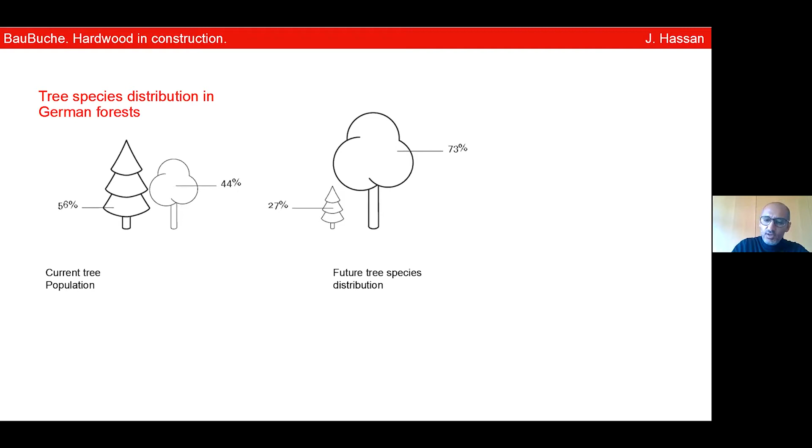And as you heard today, the forests are changing. The next generation will have much more broadleaf species. This will be up to 73%. And if you look into the timber construction business, there is a totally different picture. In timber construction, hardwood hardly plays a role. The amount is something like 1 to 2% only. Timber structures are dominated by softwoods today.

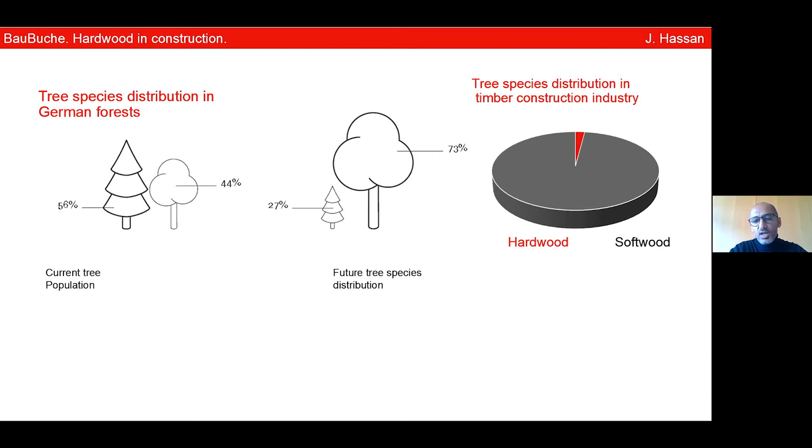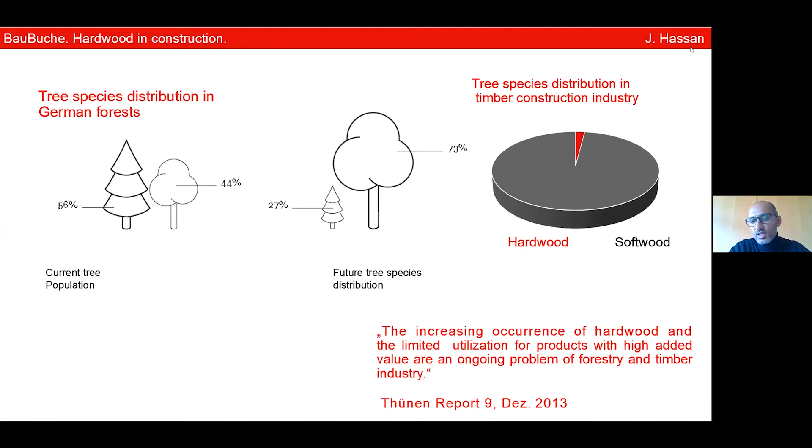And the Thünen Institute in Hamburg has summed it up as follows: the increasing occurrence of hardwood and the limited utilization for products are an ongoing problem of forest industry today. If you ask a forester in Germany, what's your main problem? He would possibly say it's difficulties finding customers for our broadleaf species, for species like European beech, for instance.

If we look a bit deeper into the broadleaf species, you will find that European beech is the most common broadleaf species in Germany. Beech amounts to about 67% of hardwood in Germany, and that's very similar in the neighboring countries, in countries like Austria, Switzerland, or France.

In Germany, we have a European beech stock of roughly 548 million cubic meters. We have an annual growth of 18.3 million cubic meters, and we have an annual harvesting volume of 10.9 million cubic meters. And if you compare the last two figures, you see that there is a huge difference. 18.3 million cubic meters of growth compared to 10.9 million cubic meters of harvesting volume.

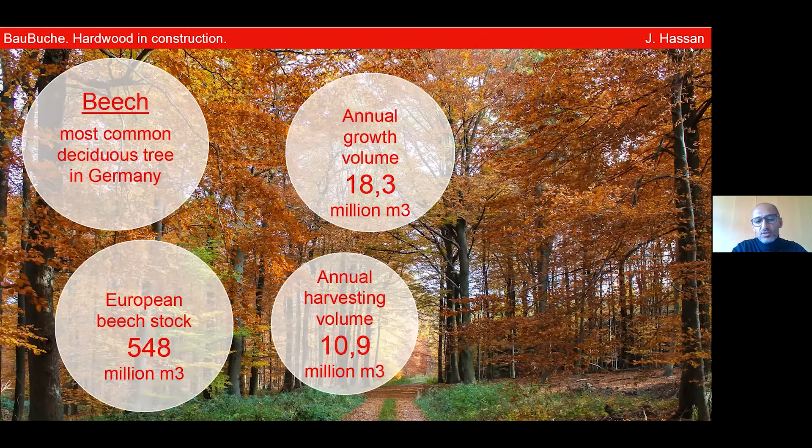That would be very much in favor of Carl von Carlowitz, a German forester, who formulated the principles of sustainability, that you are not allowed to harvest more than is growing in the same period of time. If you look at European beech in Germany, there's a huge difference between growth and harvesting. So we have a lot of reserve in European beech, a lot of reserve in terms of increased harvesting that is possible without violating the principles of sustainability.

And this leads to the fact that beech is one of the timber species with the largest reserve from sustainably managed forests. If you want to look for a specific wood species where you can increase usage easily from sustainably managed forests, that would be European beech. So why isn't European beech used much more for timber structures?

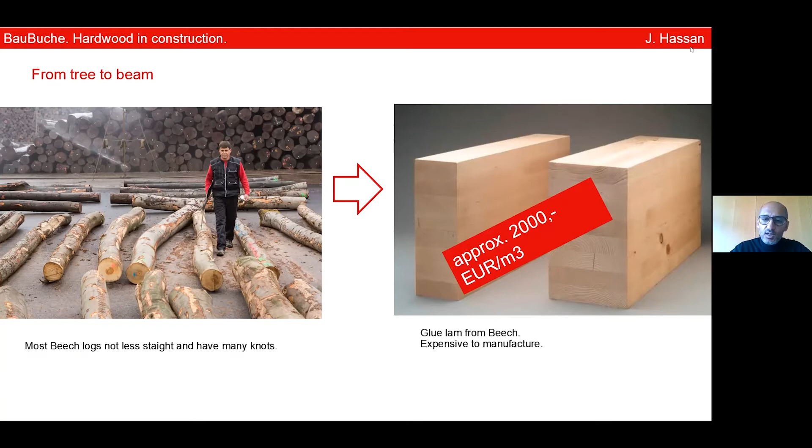Our company asked the question 5 years ago, can it be done more efficiently? Can it be done more efficiently to make a beam from a tree? And we said, yes, that's possible with new technology, when you use veneers rather than boards in the form of laminated veneer lumber. Nobody had ever done that before with a hardwood in the world, so we had to develop a new process, and finally in 2014 we started our production after investing something like 120 million euros into a production facility.

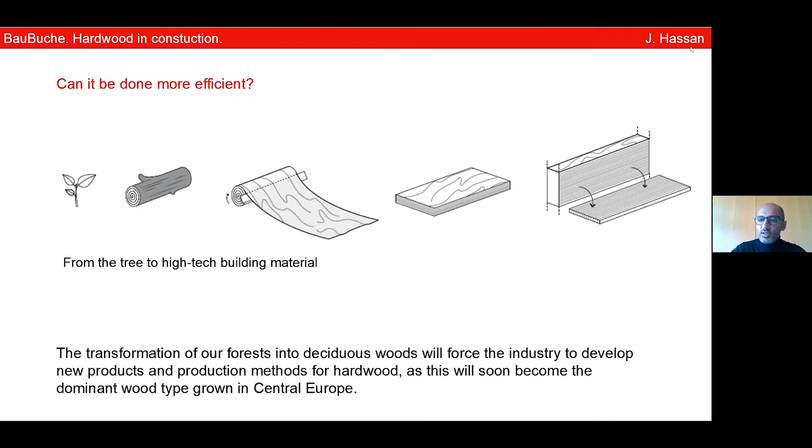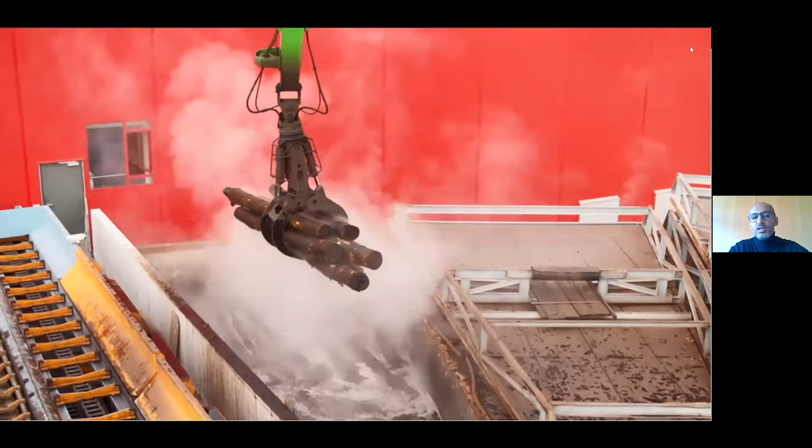I have prepared a short film of the production facility that shows quite quickly how we produce laminated veneer lumber from beech. I hope the film gets through the weak internet line. I hope it's working and visible for you.

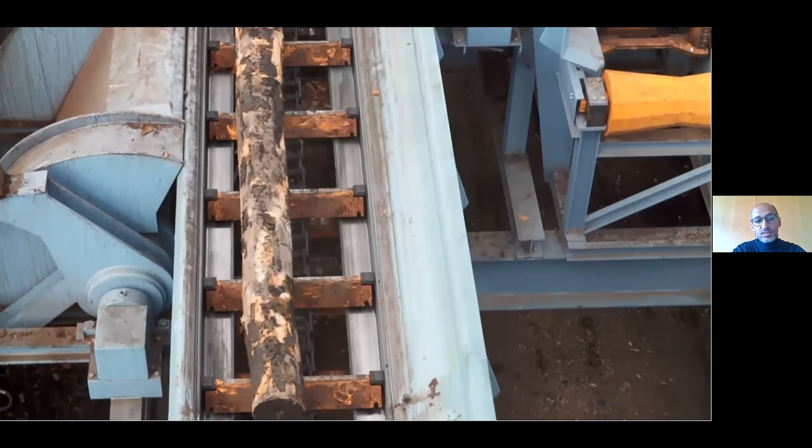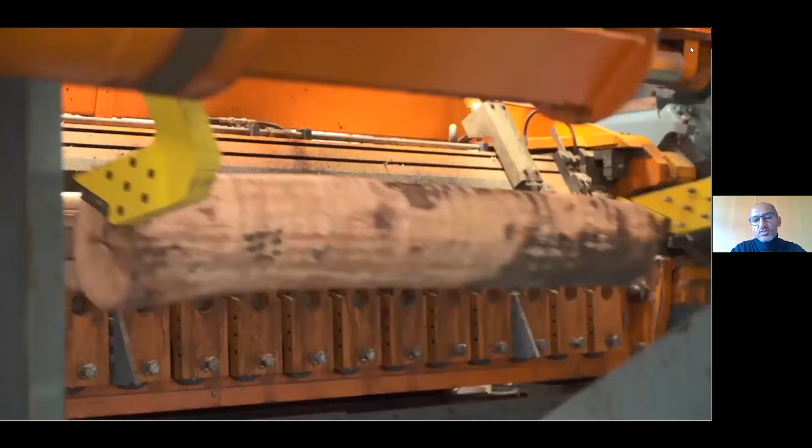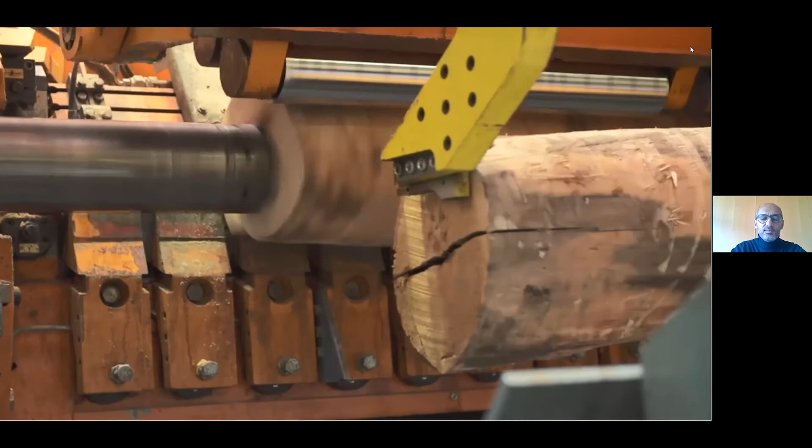The first step is that the logs are put into hot water for 48 hours. We have just seen that. The logs are debarked, cut to standard sizes, and then are peeled. That's a peeled veneer which we produce here. It's a very quick and efficient way of producing veneer from a log. It's a rotary peeled veneer, and all that is left is a 10 centimeter core of that beech log, and the rest is turned into one long slice of veneer, which is 3.5 millimeters thick.

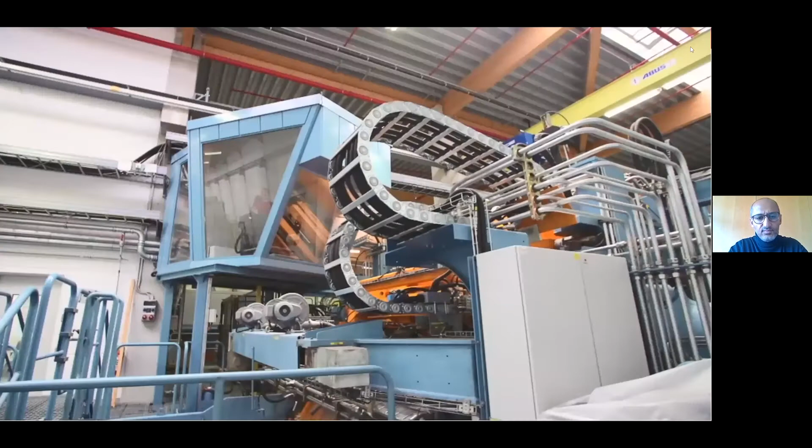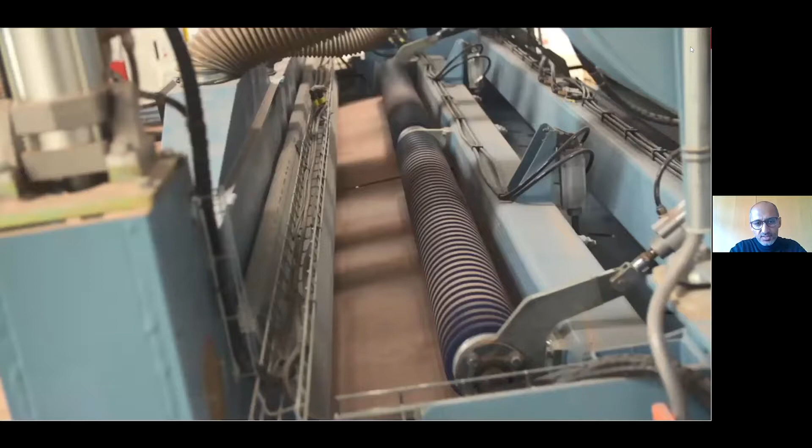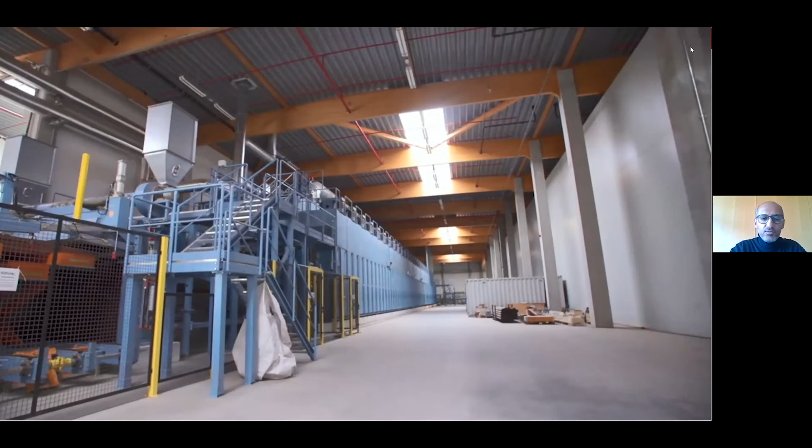That's a peeling machine. The veneer is cut into standard sizes, and these standard sized veneers are then pulled into a veneer dryer. Since the veneers are thin, the drying is quite quick and easy. The veneers are dried within 15 minutes down to a moisture content of 4%. After that, the veneers are scanned. They are checked for knots and discolorations and sorted into different grades.

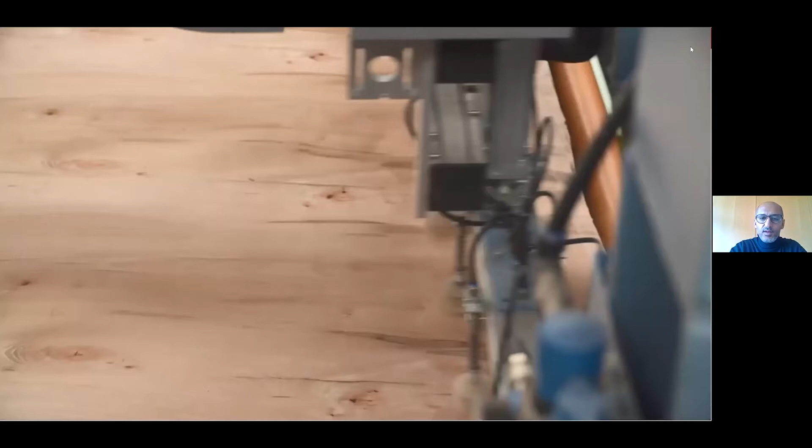After that, resin is applied, a phenolic resin. You can see that now.

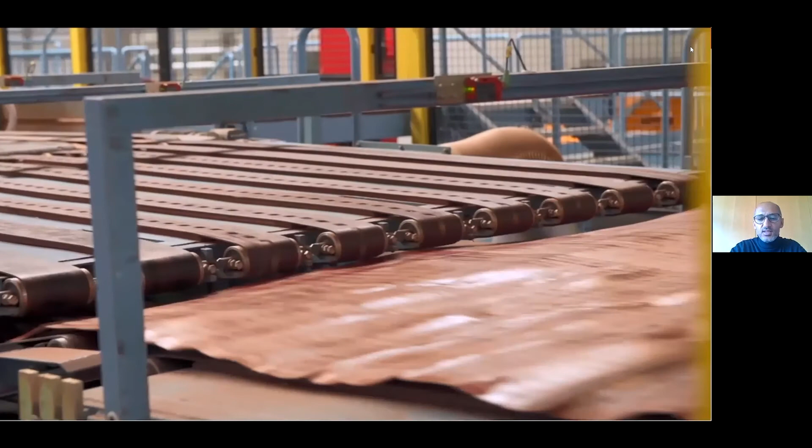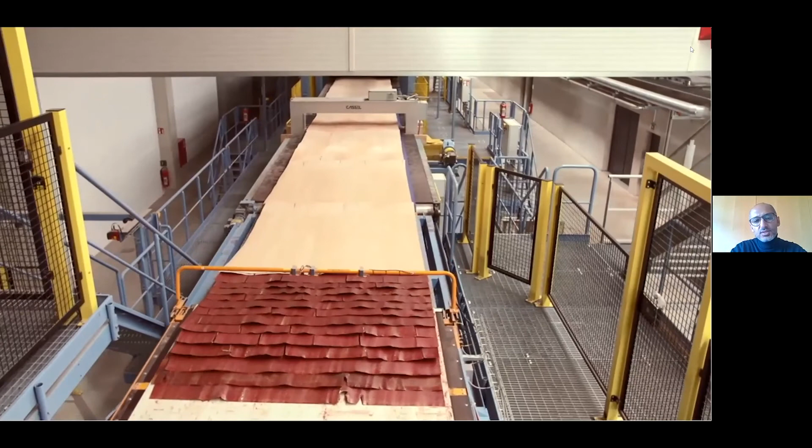After that, in the next step, the veneers are laid into an endless strand of laminated veneer lumber. That's a two-step process. In the first step, books are formed, and then those books are married together to form a continuous endless strand of laminated veneer lumber.

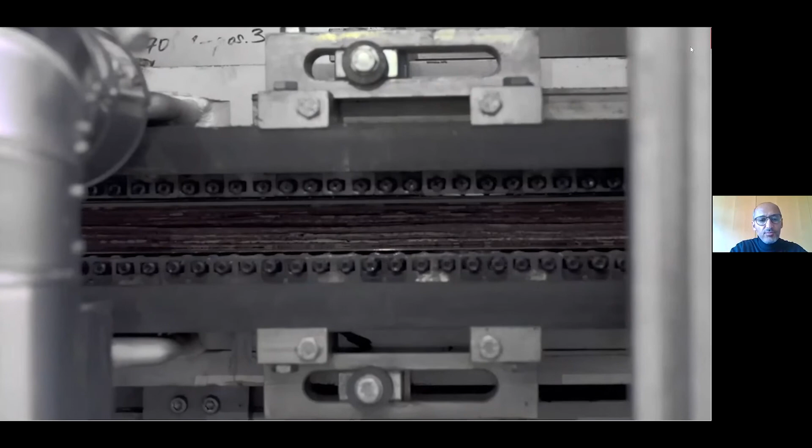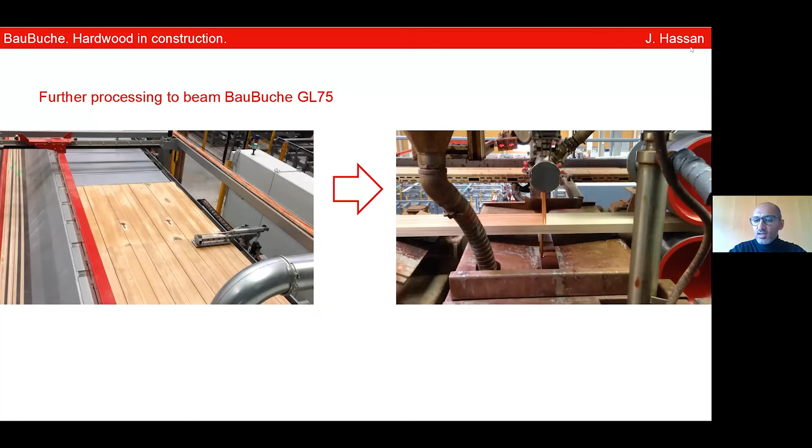these boards are processed further to Baubuche GL75 beams. The boards are sliced into lamellas, which you can see on the left side. On these lamellas, a second time, glue is applied, and then those are stacked into beams. They are driven into a press, and there is a secondary gluing process to form large-scale beams.

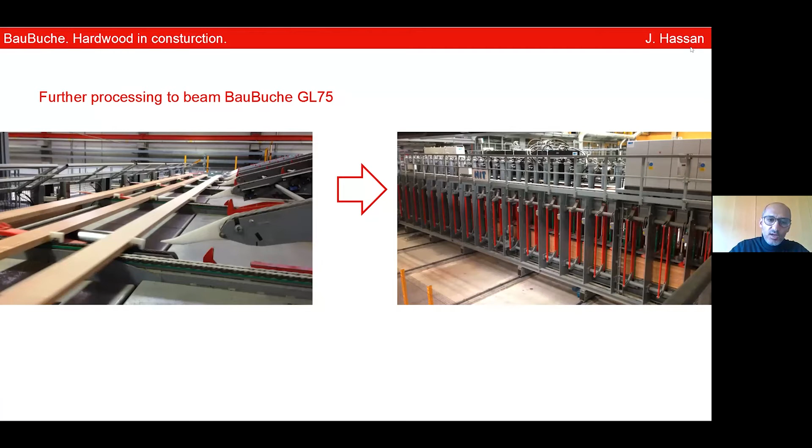With this process, we produce 4 different products. You can see from the left the Baubuche Q. That's a board, a basic product. There are 2 types. Q does have some cross-ply veneers. With board S, all veneers are directed in the same direction. If you put those lamellas on top of each other with a secondary gluing process, you can produce large-scale beams.

And there is a 4th product, which is BauBuche Paneel. It is a product with all the veneers upright standing. It's just for visible applications like stair steps.

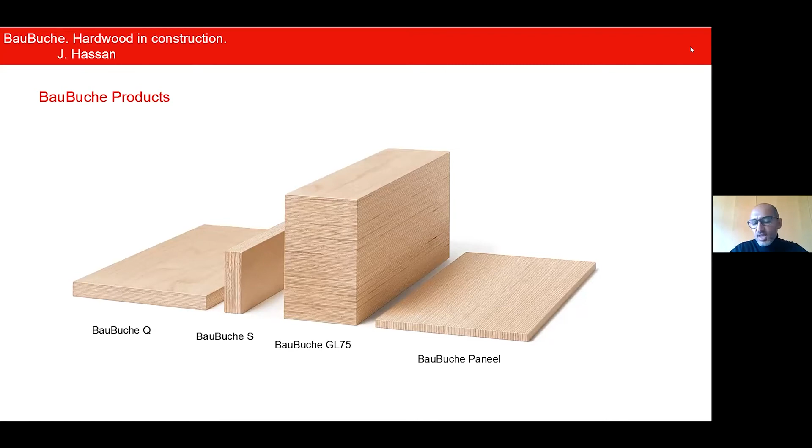What's special about this product? First of all, it's much more efficient. The large-scale beam costs around 700 euros per cubic meter. If you compare the traditional way of manufacturing beech or hardwood into glulam, it cost around 2,000, so it's a much more efficient, much cheaper product.

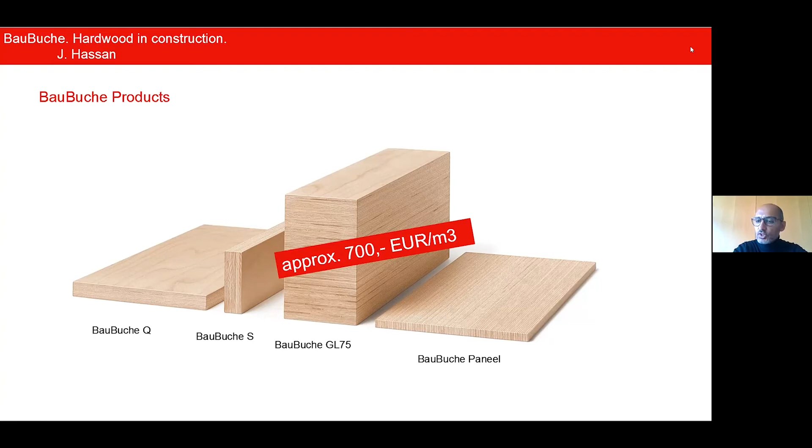The second thing, Baubuche GL75 is very strong. Very strong means the strength characteristics compared to traditional glulam made from spruce, a typical material for building, are roughly speaking 3 times higher. We have 3 times higher strength, which means we can build much slimmer structures, we can do wider spans, we can build higher buildings, and so on.

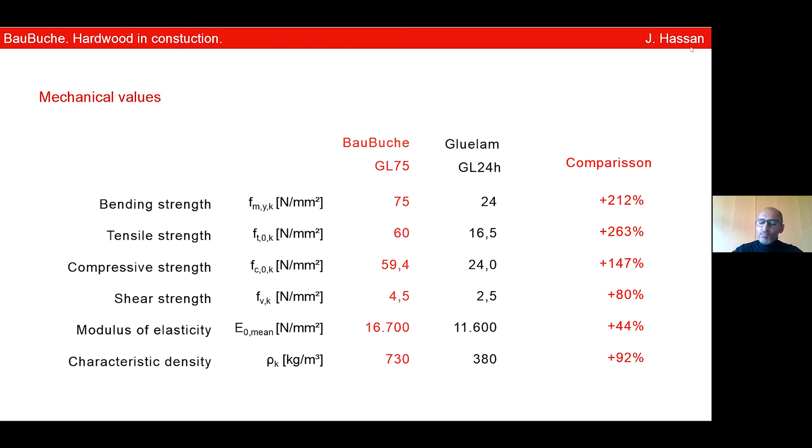And that leads to the next topic. What is laminated veneer lumber used for? It's used for tall wooden buildings because of its high strength. It is used for wide span roof structures, and it is used for building with visible wood structures because beech has very good surface characteristics. You know it from furniture. So those are the 3 typical applications.

Have we done projects since 2015? Yes, we have done many projects. You can find them on our websites. I'll just give 3 examples.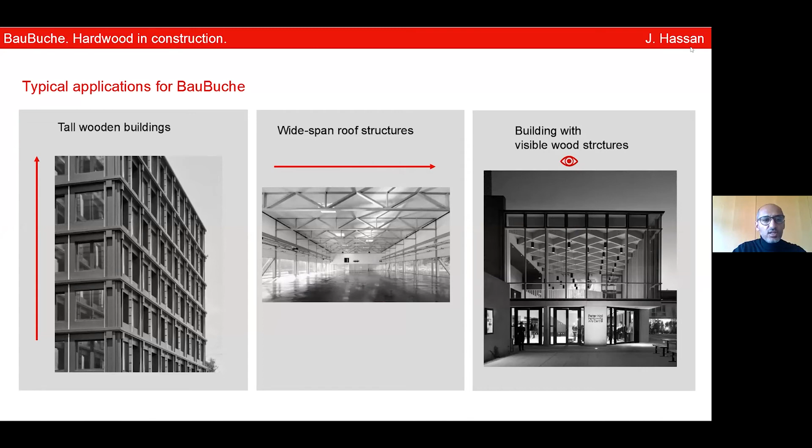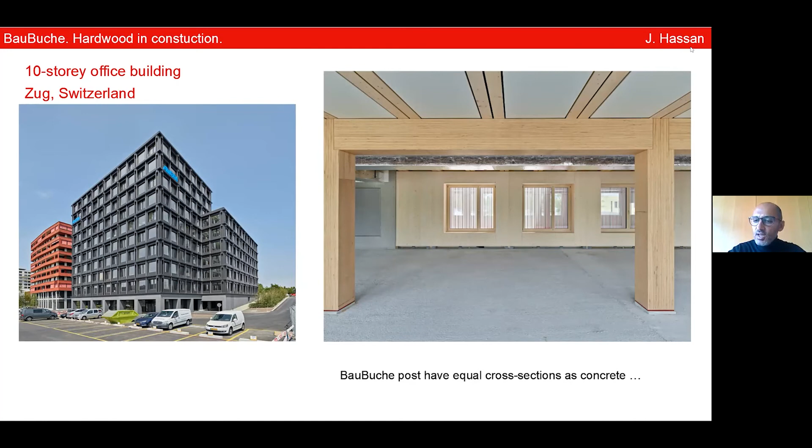One example is a 10-story office building in Zug in Switzerland, 10 stories with all posts made from European beech. The posts are as slim as if they had been done with reinforced concrete. The compressive strength, 60 Newton per square millimeter, is very similar to concrete. So the elements do not need to be larger than concrete, and in theory, you can build as high as you can build with concrete.

The second project I want to show is a production hall which we built in Germany, in Waldenau, for the company SWG. It's a screw manufacturer. This production hall has a free span of up to 42 meters.

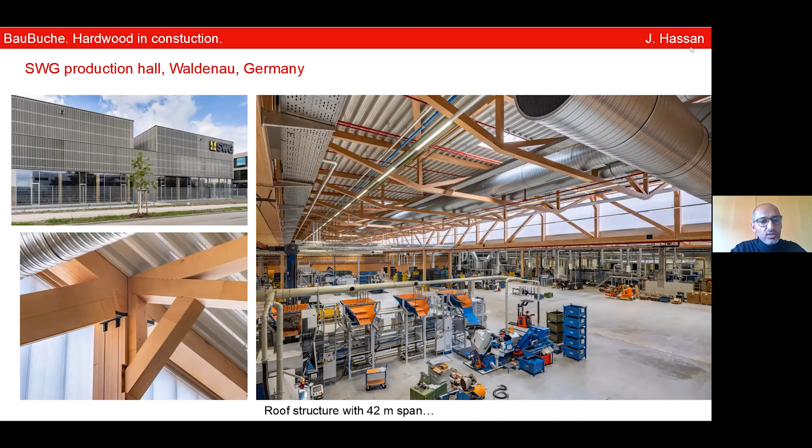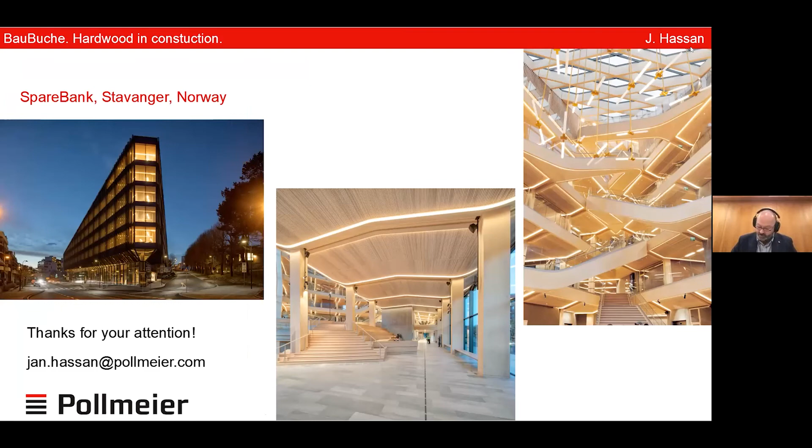I think there is some hope for future hardwood production for forest owners. So I have a very short question. Is this approach also applicable for other broadleaf tree species than beech? For instance, oak, which might be a future tree species in climate change. Is it also applicable for oak?

Yes, it would work equally well from a technical side for other species like oak. It has not been done yet because all the technical approvals, all the technical data, are connected to the species. If we were to use oak, we would need to do that again for oak. That would take something like 2 years and cost a few hundred thousand euros. So with that burden, it would be possible at any time.

Okay, thank you. And then there is a last question by Constantin Launeux from University of Brussels. He asked, do you see any future automation in non-regular sized tree transformation thanks to, for example, image recognition or any other form of artificial intelligence? I didn't really, could you repeat, please? Do you see any future automation in non-regular sized tree transformation thanks to, for example, image recognition or any other form of artificial intelligence?